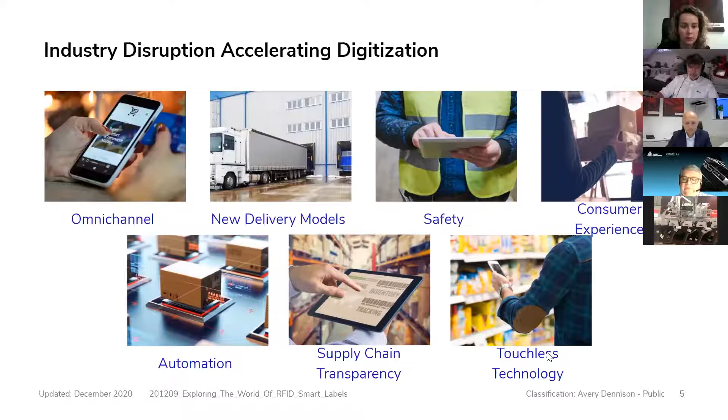So a lot of interesting areas where you can actually engage with digital IDs of your products within multiple areas of business. If you translate this into business areas, what are the key driving businesses apart from the apparel industry - fashion, footwear, etc.? It's primarily the pharmaceutical and healthcare industry, where the focus is pretty much around inventory management, patient safety, and connected consumer. I have an example for that later on in the presentation.

Brand protection, ensuring the authenticity of your product and preventing diversion of the product, for example selling into some Asian countries. Labor and operational efficiency in production, in warehousing and distribution, but also in the automotive space, where the RFID adoption, if you look at the adoption in the apparel industry, is basically second to none currently. So major automotive OEMs around the globe already use RFID technology, especially in the area of production, supply chain, and spare parts management.

It's pretty much about part tracking, tracing, and following up the process, helping automation in manufacturing, but also making sure there is a seamless supply chain from the automotive supplier down to the OEM, and from the OEM into the shop where you then finally can buy the car.

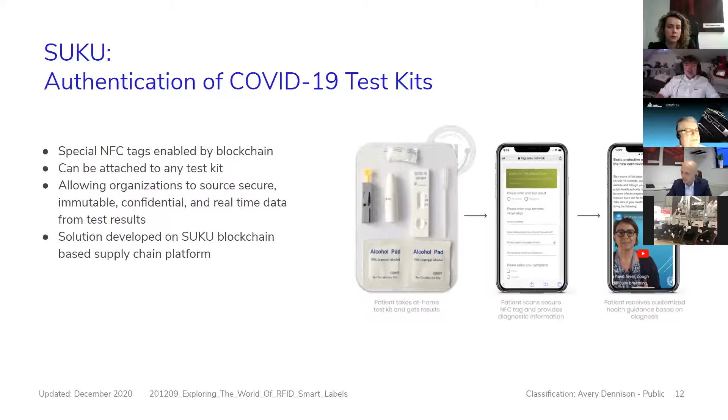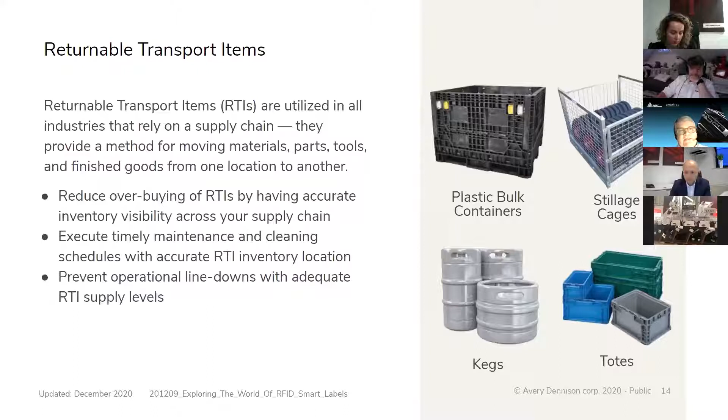So this is also a very common use case in the industry, from aviation through transportation, large carriers, postal services, etc. We see these types of applications using RFID as a technology to actually improve the process.

So when we're talking about Avery Dennison, who are we? What do we do? I already told you - we are the manufacturers of RFID inlays and tags in the market. Our ecosystem consists of you, the audience listening today, and our partners in the market.

So RFID converters - companies that insert an inlay into, for example as we see in this picture, a hang tag in the apparel industry. We have system integrators that build the infrastructure needed to use the technology, from hardware like readers or printers.

Encoding machines, or just front-end software you would use to manage the data or format it in the way you want to make it visible to yourself or the end user. And we have the consumer, the end user, as I mentioned in the Adidas example, or in the production or supply chain example, where RFID eases up the processes and allows them to be part of the IoT.

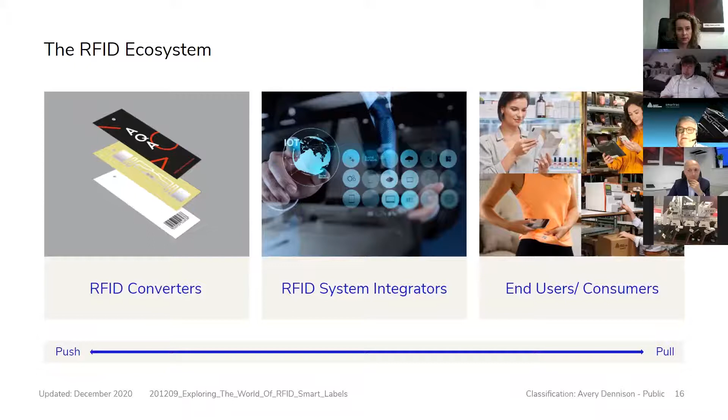Who are we, Avery Dennison? We're a company that's been in the market for a very long time, and we've been producing RFID technology for more than 20 years.

We have a global manufacturing capacity of more than 12 billion RFID inlays a year, produced in 7 manufacturing sites: 2 in North America (Mexico and North Carolina), 2 in China, 1 in Malaysia, 1 in Romania here in Europe, and another close to Cologne where we produce hard tags for special purposes like animal and pet tagging. So we also produce those ear tags you see on cows grazing in the field, using RFID technology from Avery Dennison.

We have global R&D capabilities, with multiple research and development centers, one in the US and one in Tampere, Finland, where we design and plan the next steps of evolution in RFID development.

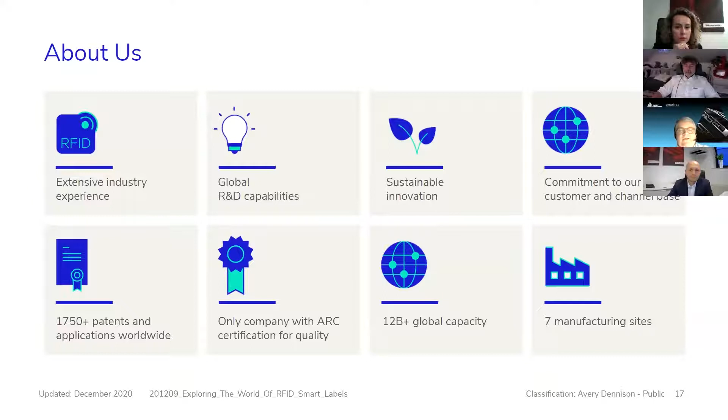We put a lot of effort into sustainability, with a roadmap ensuring we follow legal regulations in that space. We are ARC certified, meaning our products are Auburn University certified, which is important for industries like automotive, aviation, and apparel to understand that our products respond to a defined specification in terms of performance and technical capabilities. As a company, we are also quality certified, meaning all 7 of our manufacturing sites meet the quality standards that Auburn University requires of an inlay manufacturer to even be able to produce certifiable products. And we hold roughly 1,750 to 1,800 patents on products and applications worldwide in this industry.

We have a global sales and customer service operation structured regionally, with teams in EMEA, Asia Pacific, China, and Northern and Southern America, ensuring you have close contact and the possibility to meet someone in your country on site. This spread of individuals is trained on RFID and understands the needs of IoT. We give our partners access to our research and development and product line management teams, and we share our product development roadmap and novelties with customers regularly, either individually or every 6 months. So you'll definitely find a colleague of mine in your country, as long as you're on planet Earth and not on another planet.

So that said: large scale, high volume RFID inlay manufacturing, 12 billion plus across 7 sites, with end-to-end quality management from product design and performance to supply chain, guaranteed by ARC quality certification and, where applicable, other industry standards like ISO certifications, and a state-of-the-art operation enabling us to be reliable on delivery times and supply.

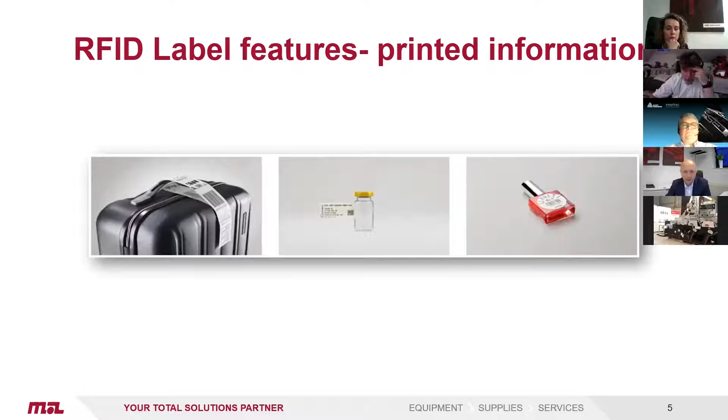RFID label features can be different. Of course, the label also has printed information, like every standard label - it has barcode, QR code, printed information. This label can be fastened, can be sewn, can be stuck to a bucket, or any kind of labels.

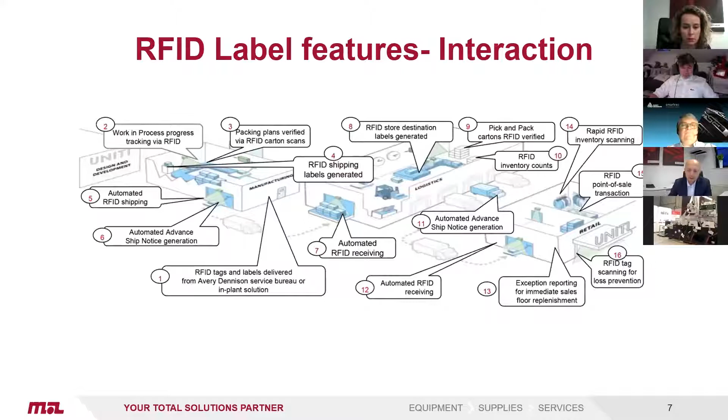The main feature of RFID labels is interaction - interaction in a production process, in a logistic process. It is well known in the automotive industry, for example, just to track assets at every part of every stage of the production process and logistic process. And this is not only in automotive processes.

We can also find it in carriers, in shipment, in baggage at airports. We can also have it in tires, in pharmacy, and also in sports to track sporters and measure their timing.

But before we go to that new kind of new stuff, let's have a couple of slides about the market.

RFID market is a kind of mature market. We have different suppliers of different parts - well-known suppliers for chips, inlays, printers, readers, and software. So this is not a new approach, but well-known and well-developed. We have RFID standards all over the world among this industry, which also proves that this is a well-established market.

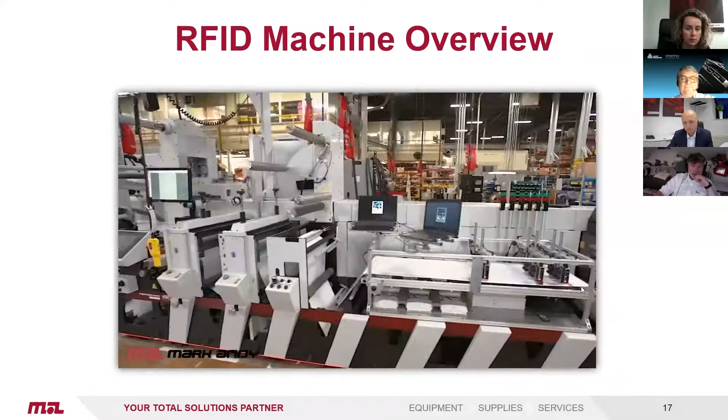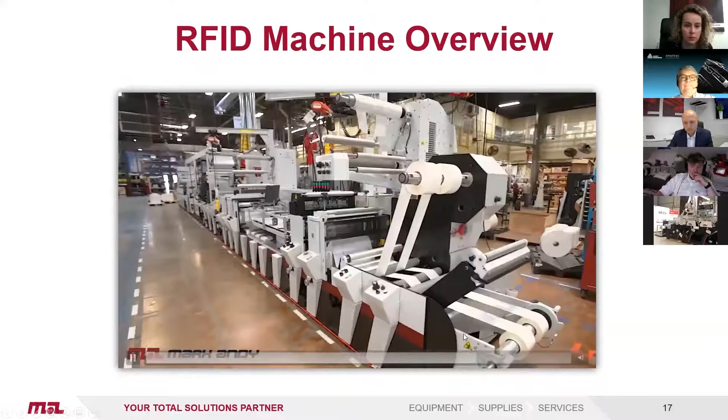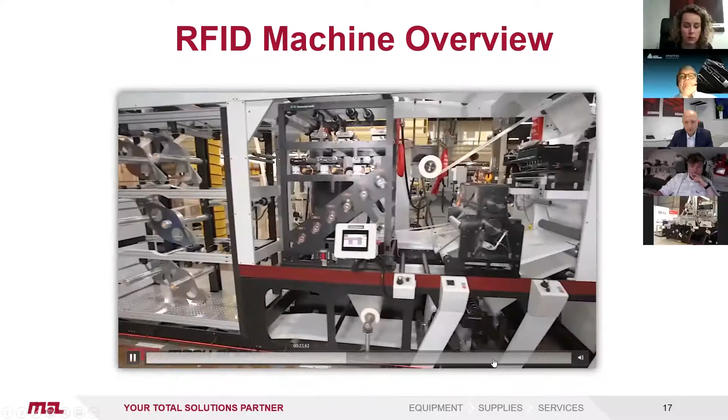I will stop in the middle. Let me choose maybe like that. Two words about our presentation today.

This machine, what you see, is a machine dedicated for everyday production, and this approach here is off-pitch RFID labels, RFID tag application off-pitch. That means the tag can be placed in any part of the label. It could be cut from the liner, from the inlay, and applied in any way under the label, under the color label, for example.

After this presentation, we will go to our demo room in Poland, Warsaw, where we have an 8-color label machine, flexo label machine with 2 cold foil units, and we will show you shortly how to produce simple RFID labels, but in an off-pitch approach.

On-pitch, it was before. On-pitch means that we cannot place RFID in a different place on the labels. So we need to suit the size of the labels to the RFID tag. We will not cut the liner, but we will just cover the inlay with RFID tags with self-adhesive material and print on top of that, and the size will be suited to the RFID tag size.

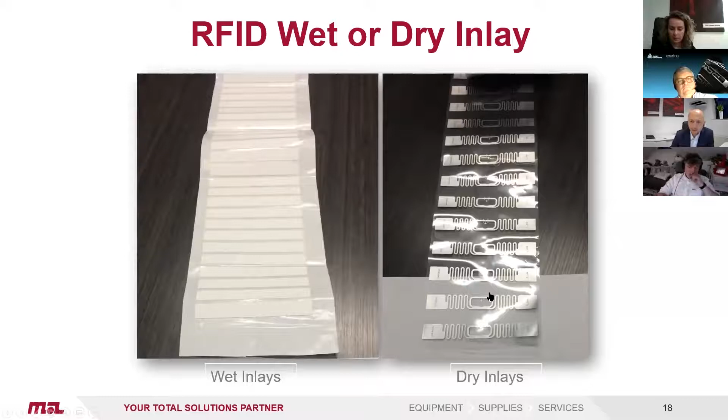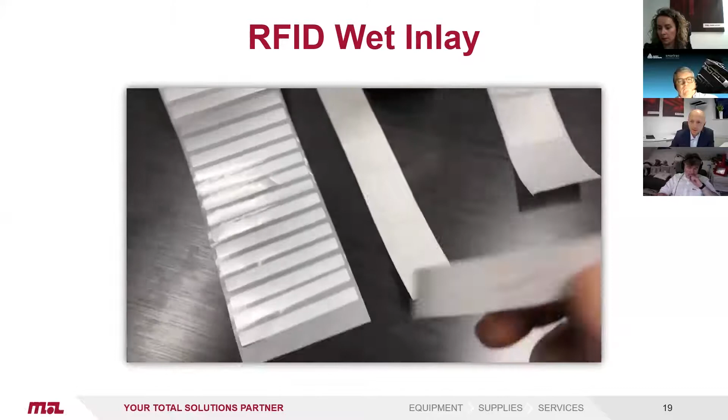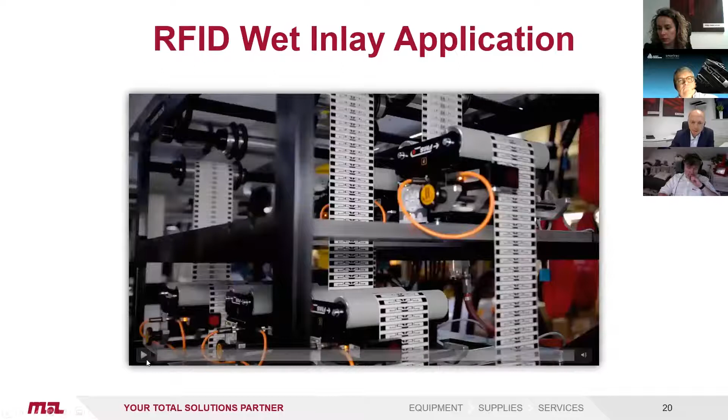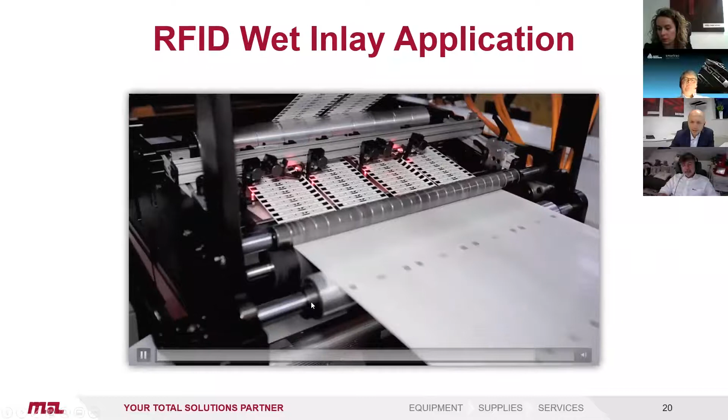Wet inlay, what is wet inlay? Please take a look at this short video. So it's a wet inlay, meaning self-adhesive tag. We can apply it with a kind of label application. We need a module which can guide, for example, 2, 3, 4 lines of inlays, self-adhesive wet inlays, and apply them like a label, a kind of label applicator.

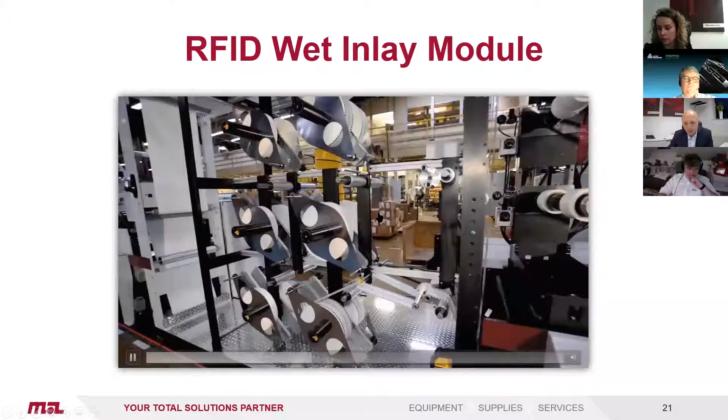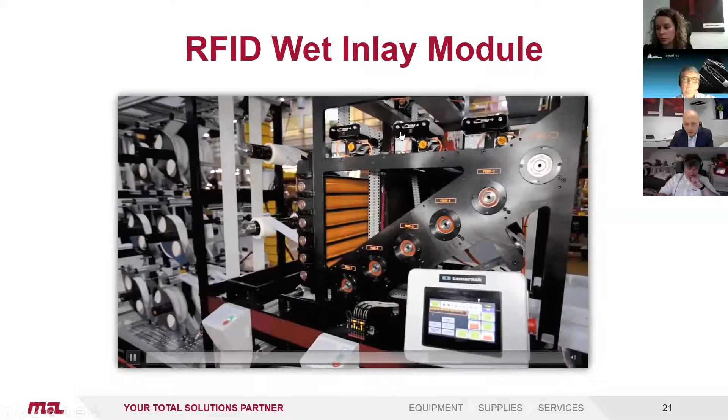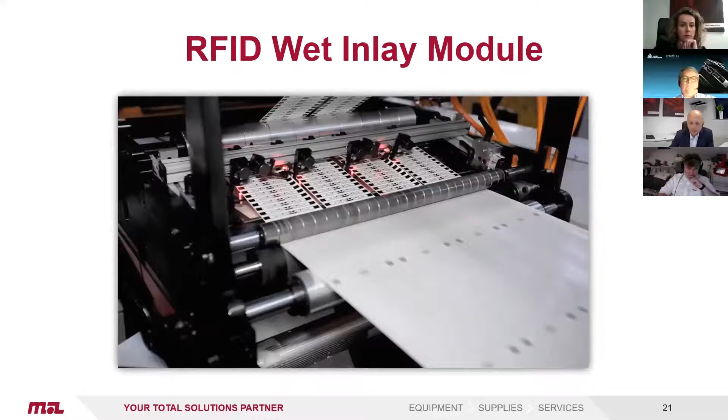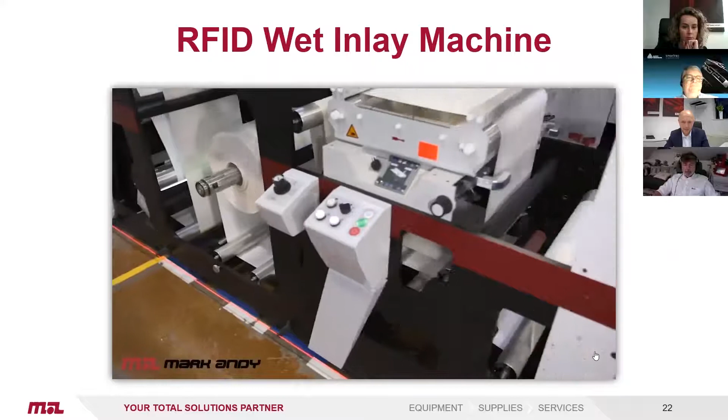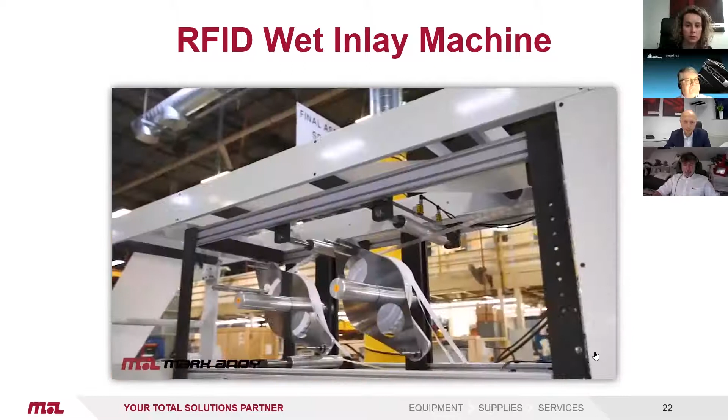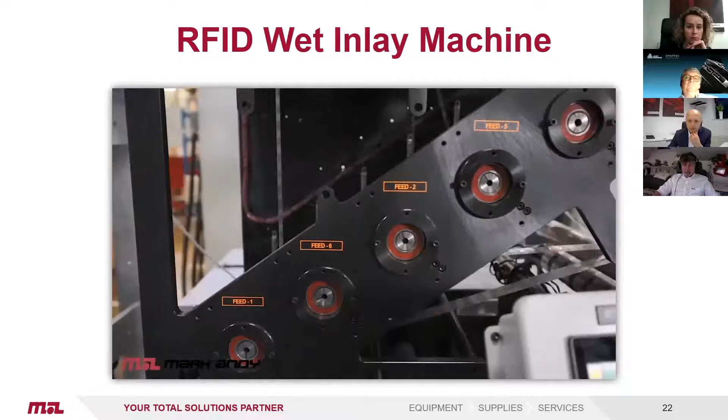That's now the full machine with that kind of labels. So we have 2 plies in the machine. That's a quite decent configuration of the machine. Tamarack module, feed 1 to 6. Sometimes you need... as it is a self-adhesive system, we don't need to use hot melt.

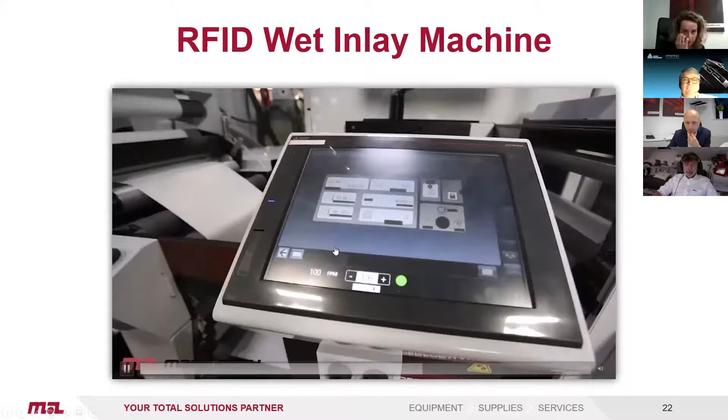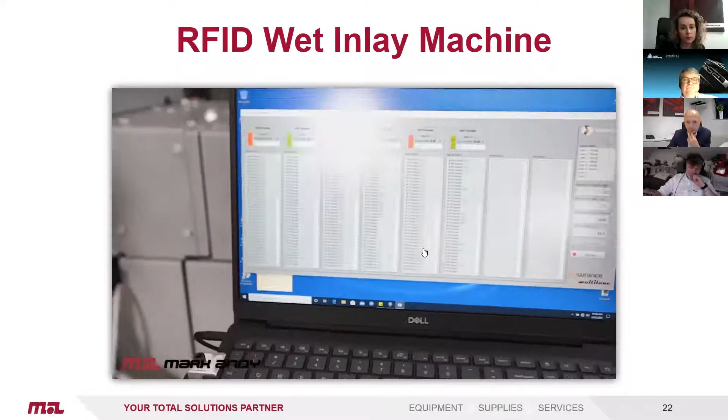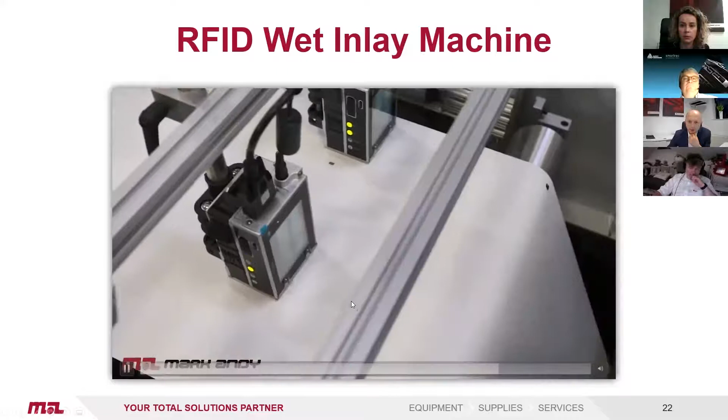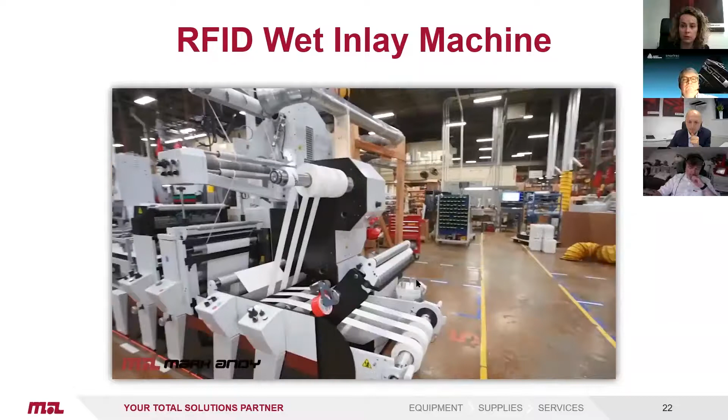An inspection system, radio inspection system. That's the inspection module. We need to check every tag for its correctness, to check if it's working. If it's not working, we will mark it with the inkjet system. So that's the wet inlay machine.

And this is the picture of the wet inlay machine. So we have printing modules in front. We have a special module for inlay application, RFID tag application. And then we have die cutting, inspection, radio inspection, and rewinding part.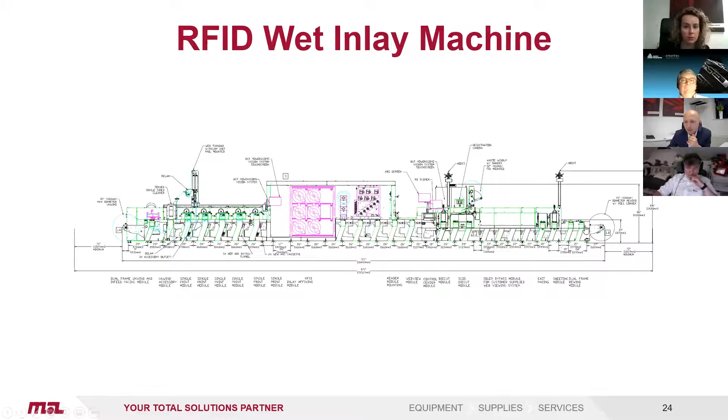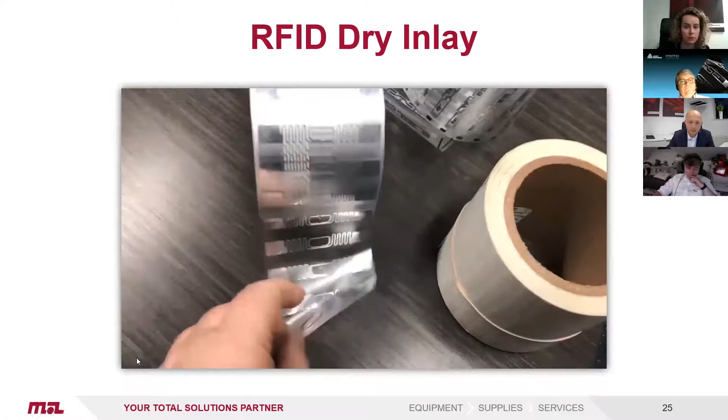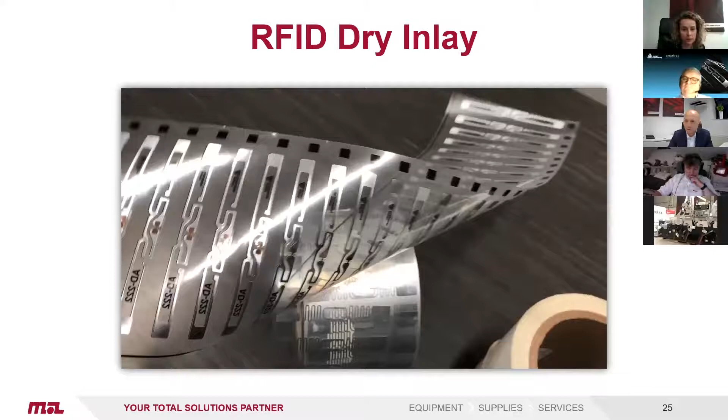And dry inlay. Dry inlay, that's not a self-adhesive inlay. Take a look at the inlay - it's just substrate with antennas melted inside. That's a dry inlay. Dry inlays are cheaper than self-adhesive wet inlay, which means they're good for bigger production. But to be able to produce RFID labels from dry inlay, we need a special applicator.

So this is an applicator with a special drum, which is a vacuum drum. And because of this vacuum, you can keep the cut RFID tag on the drum and apply it in auto-register to the label, under the label. That means the distance between the RFID tags can vary. That's off-pitch technology.

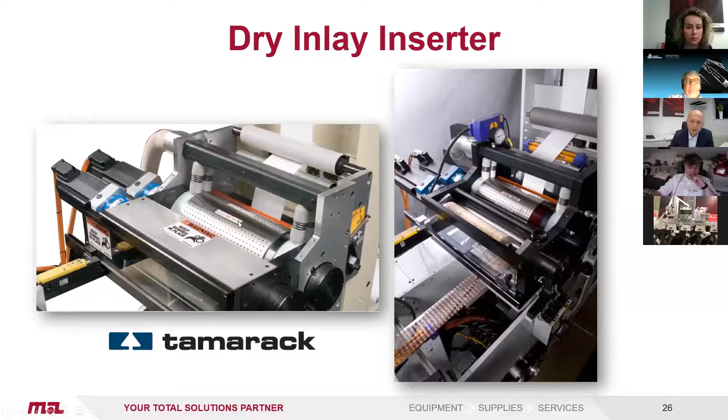On pitch, you cannot change the distance between the RFID tags. That's the main difference between what we see now in the presentation and what we're going to see in our demo room for a short live demonstration. There's going to be on-pitch, not off-pitch, meaning the distance will not vary. Examples of the machine for dry inlays with this special applicator.

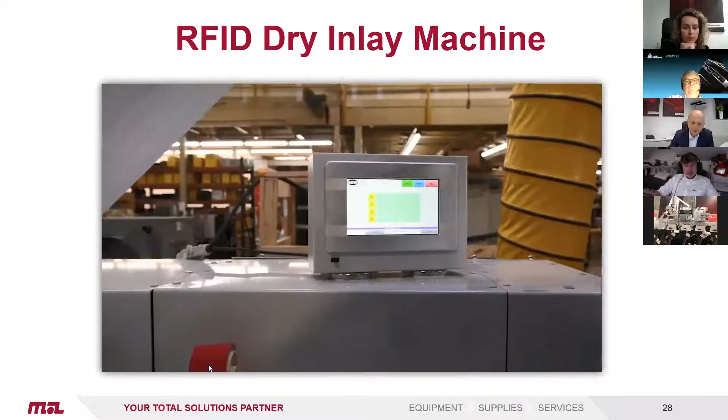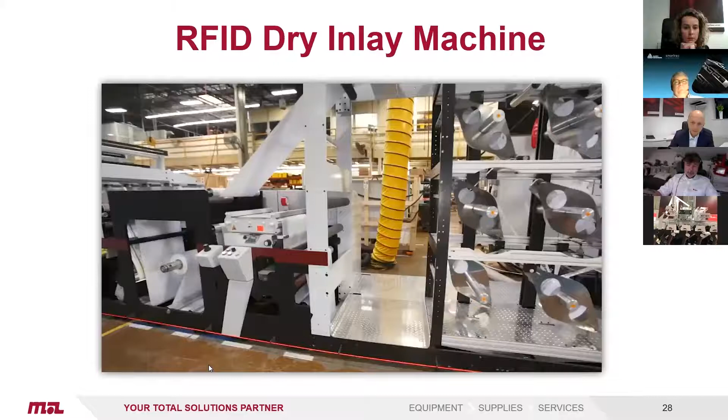So, printing before. We have unwinds as well. We have web guides and the drum, the vacuum drum, which can place RFID tags off-pitch.

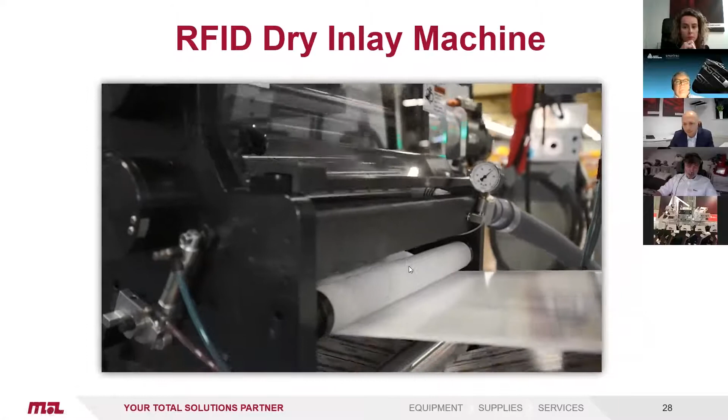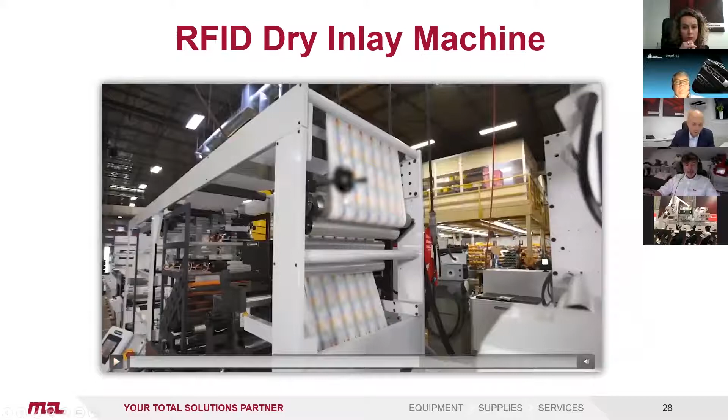And because of this, let me stop for a second, because it consists of two monoplies, monosubstrates, that means we need a glue. We need a glue to glue the tag to the face, and we need to glue the tag to the liner. So basically, for that kind of production, we need two hot melt systems.

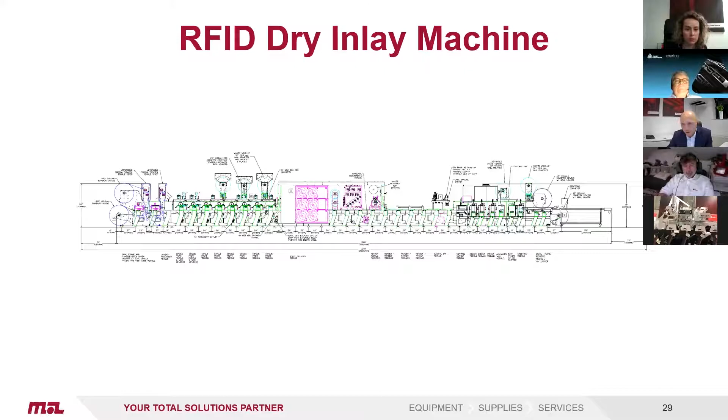Yeah, but this is a drawing showing some view about the consisting, about how to produce the label RFID labels from two webs. It could be two self-adhesive webs or mono material. That's a kind of special RFID tags, RFID label production, but we can also have just some simple one.

The simple one can look like that. So we have one web printing, then delam, so we separate the face from the liner, then we apply RFID tags, glue it to the face, to the liner. At the liner side, we have hot melt system. We glue in the position of the RFID tag. Then we relam face and liner back again, die cut and rewind.

And that kind of machine could be quite suitable for color labels, for our everyday product labels, like for food, for cosmetics or stuff like that. So that's a kind of simpler configuration than that one before.

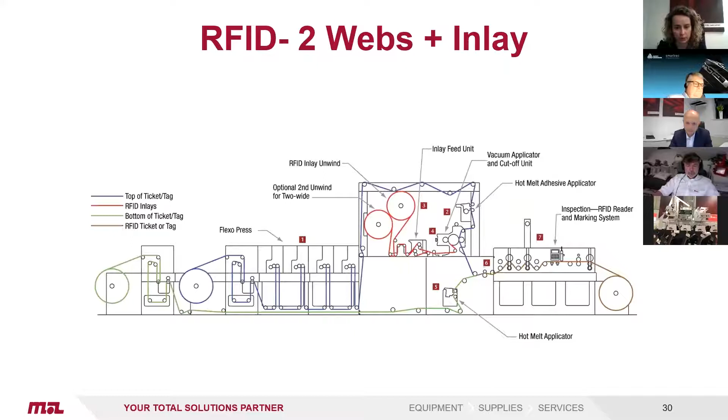These machines, which we presented now during this PowerPoint presentation, that's a configuration for off-pitch production. Now we will move to our demo room, and we will show you live presentation of

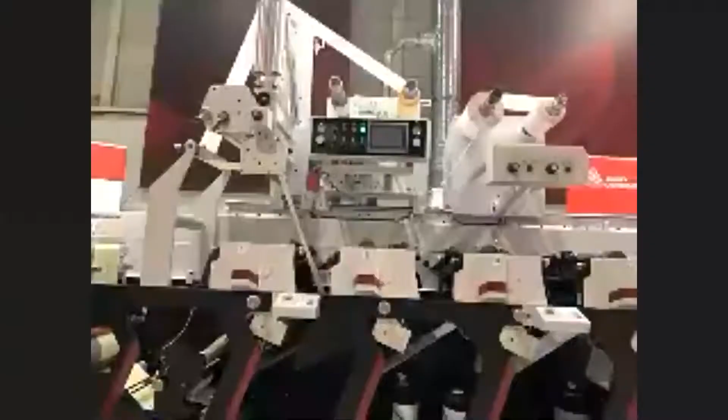So now we are in our demo room in Warsaw. We are in front of Evolution series machine. This is a typical label machine, 8-color machine, 13-inch printing width, equipped with everything what you need for labels. Evolution series, that's a machine, also UV machine, UV drying machine, with delam, web bar, and 2 cold foil modules. We need for on-pitch RFID labels production, we need 2 cold foil modules, or we need 2 unwinds and 2 laminators to do that production.

As you know, Mark Andy is one of the oldest narrow web machine production, back to 1946, and we have a lot of installations worldwide, thousands of it. We specialize also in different kinds of machine configuration for different products. Also, we have a quite nice range of digital and hybrid machines. And one of our specialties is, as I told you before, RFID label machines.

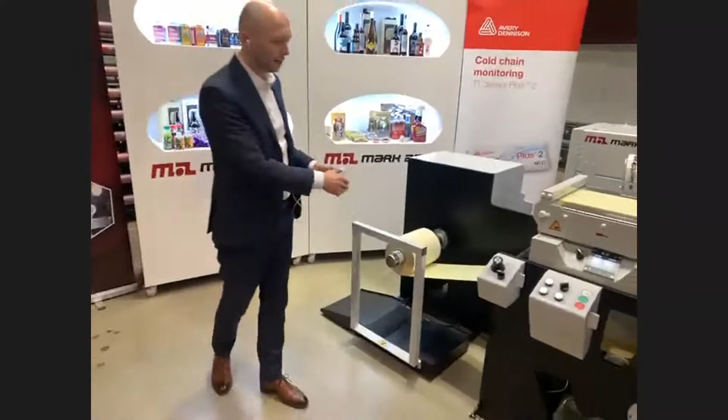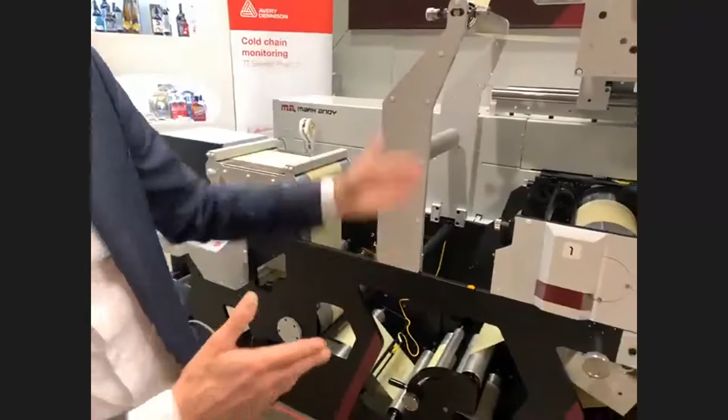So what we have, that's an 8-color machine, 13-inch wide, with unwind, web guide, ultrasonic sensors, and we have the delamination module and relamination module, and 2 cold foil units, as I told you before.

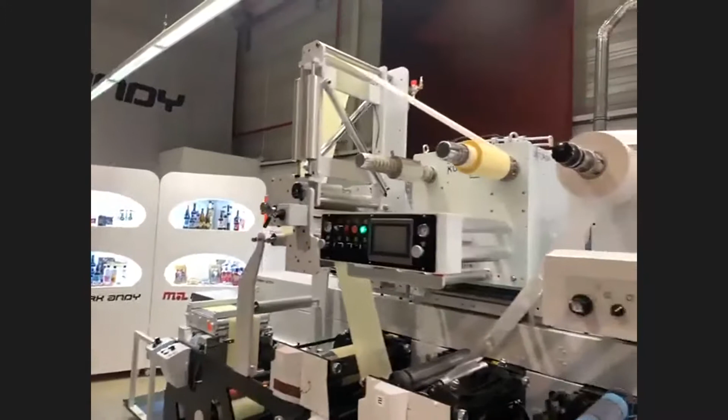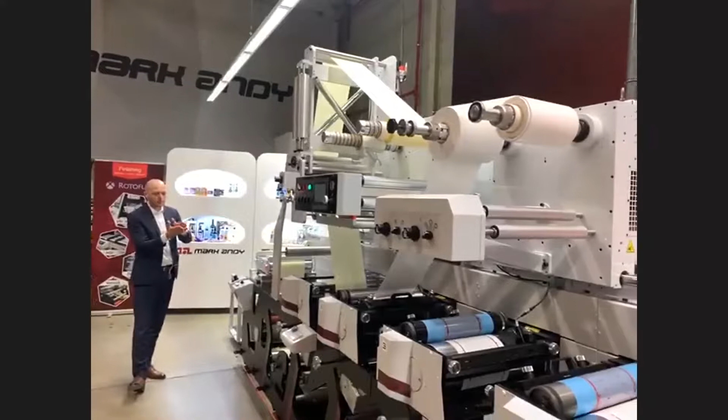From substrate point of view, we start from transfer tape. What is transfer tape? Transfer tape is a ply of glue between 2 liners. So we will take out 1 liner from the middle of the machine, and this liner will leave the glue side.

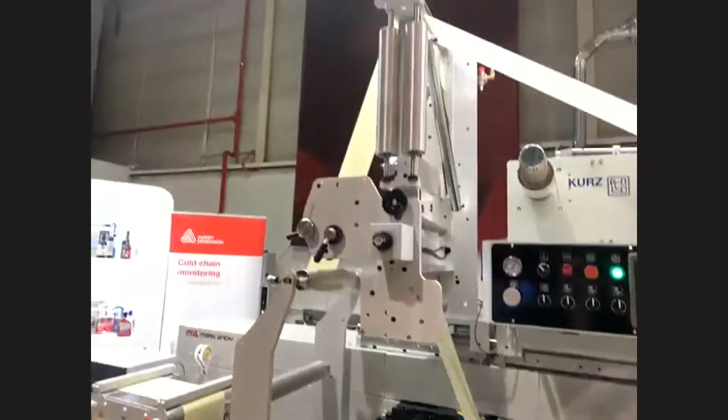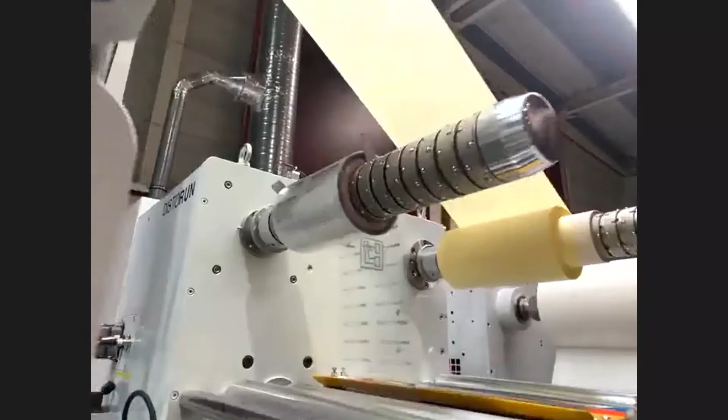Then to the glue side, we will attach the RFID. So we will glue dry inlay with tags, with RFID tags. And that's gonna be 2 lines of RFID tags from the differential shaft.

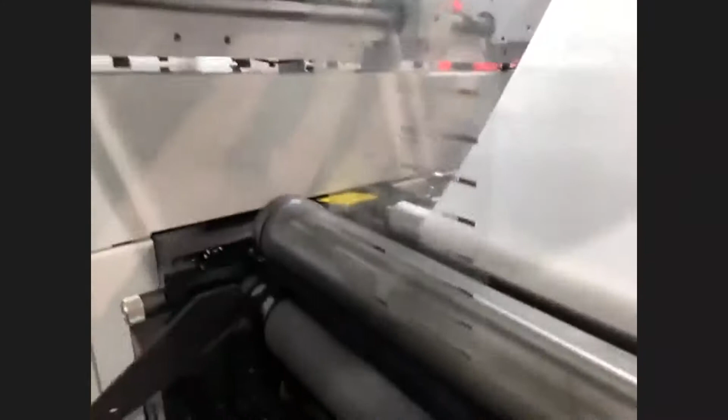So what you see now, it's a place where we glue dry inlay to the glue with RFID tags, and then we put on top self-adhesive material, the face with the glue, and the liner is taken out by the rewind. And unwind will place the face with the glue on top of the RFID.

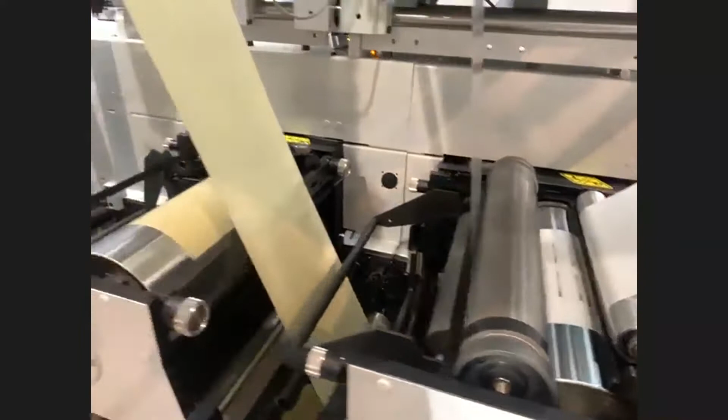We have an auto register sensor, the blue one, which reads the RFID tag as a mark. So we use it as a mark and print in auto register marks on the next printing station, which you will see in a moment.

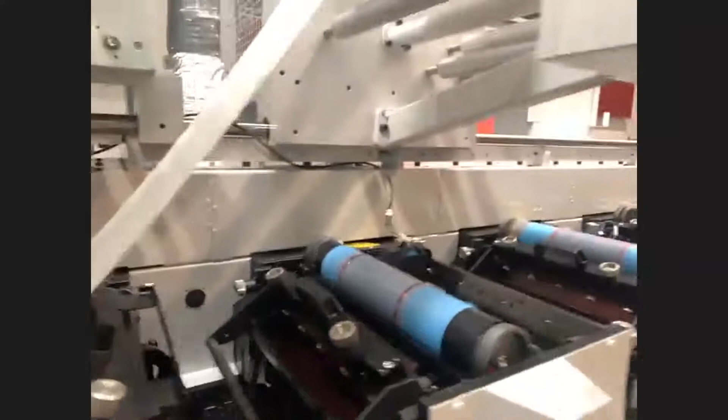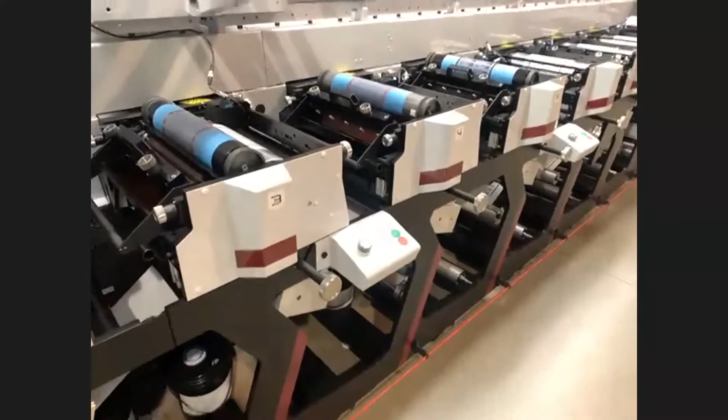Inlay, self-adhesive material, and on the next printing station, flexo printing station, we print marks. And this mark will be used as the auto registration marks for next printing. So we will print on this printing station, we will print Avery and Mark Andy logo and black content on this printing station.

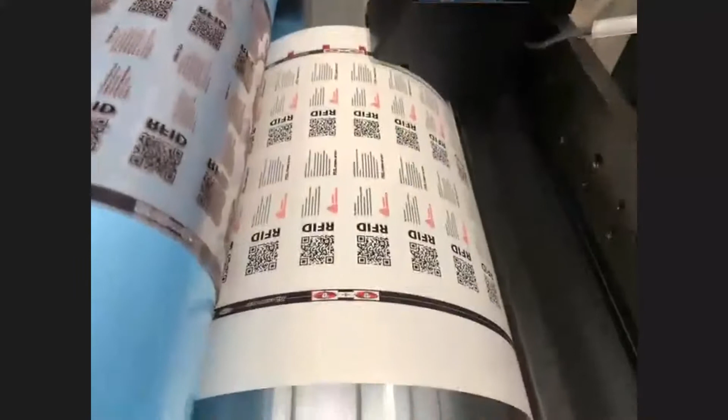So I will just repeat once again. This is on-pitch technology. That means that the size of the label, final label, needs to be similar to the size of the RFID tag. Because in this approach, we cannot change the distance between the tags, because we cannot cut the tag, cut the inlay, and separate the tag.

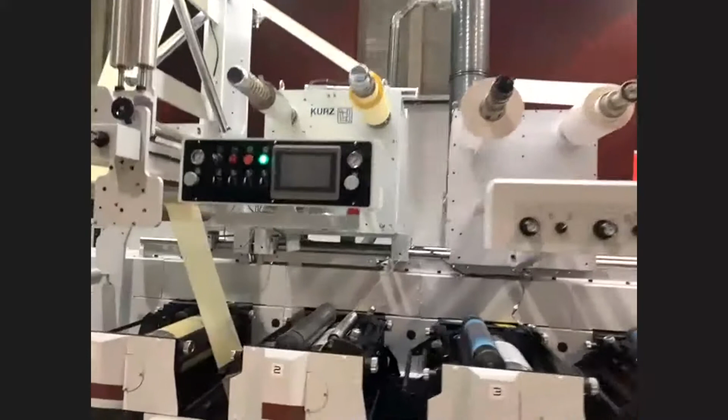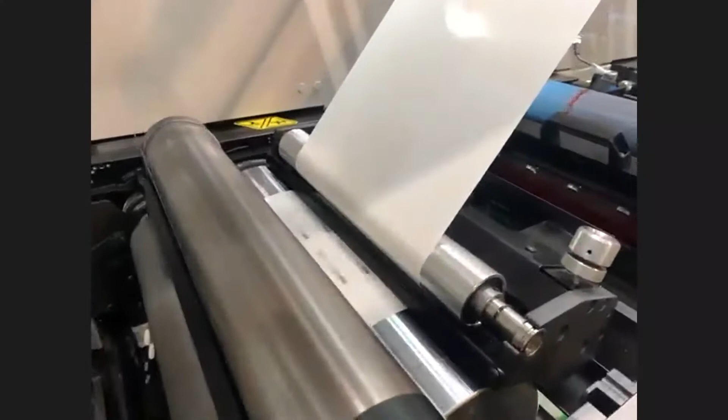Let's run the machine, Grzegorz. So as you see, we unwind dry inlay, we glue it to the transfer tape, then we cover everything with self-adhesive material. And we print everything in auto register.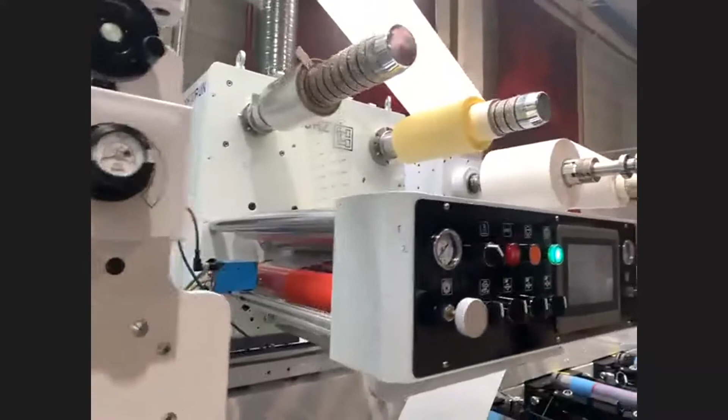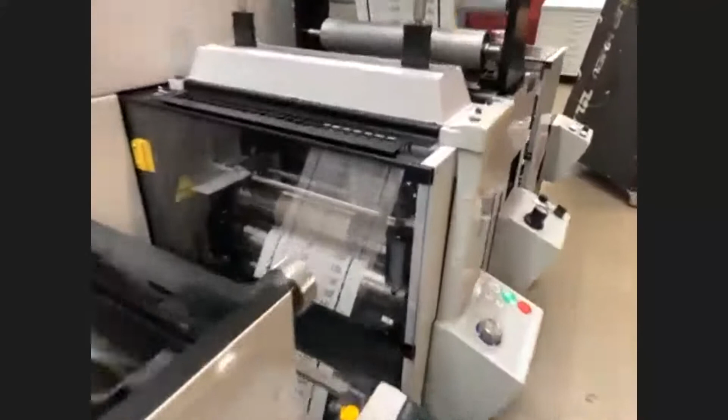That's a simple 2-color job. Well, 3-color job, sorry. One color is for marks. That's our approach, very simple approach to produce on-pitch RFID labels, on-pitch application, tag application.

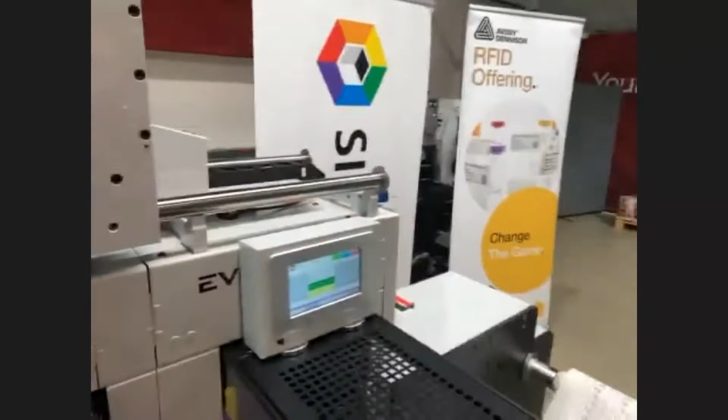And that's an example of the final tag.

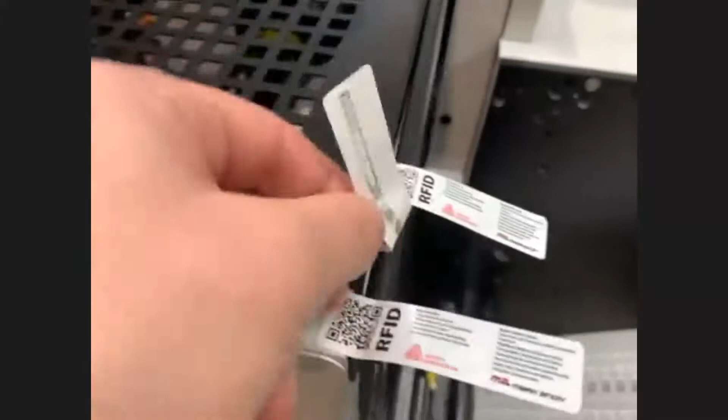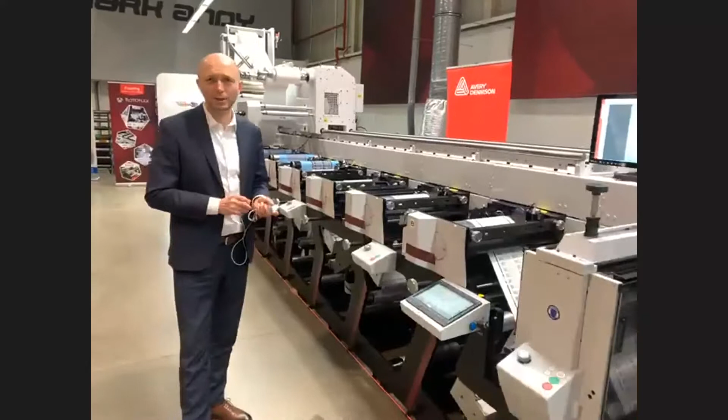So that's a short demonstration, a live demonstration on RFID tags application, once again on on-pitch technology, on-pitch approach. If you have any question, we'll be more than happy to answer it together with Avery. I will go back now to my computer, and you are free to ask any questions. Thank you for that part. See you in a minute.

All right, so I'm back again. Okay, I think we can start with the first question. Let me read it. Okay, so let's start with the first question.

Do you think RFID print construction will be migrating to the converter PSP for inline printing, instead of integrating post or preprint? Very long question, but I hope Patrick can answer it. As I already wrote in my answer in the chat, yes, that's already happening in various use cases and industries, especially around apparel and automotive, where a lot of conventional converters have invested to enable themselves for RFID, doing the classical conversion but inserting RFID, and in many cases also encoding according to their end users' requirements. That's absolutely happening in the market, and I'm sure a machine like the one Mark Andy is offering enables you to do that.